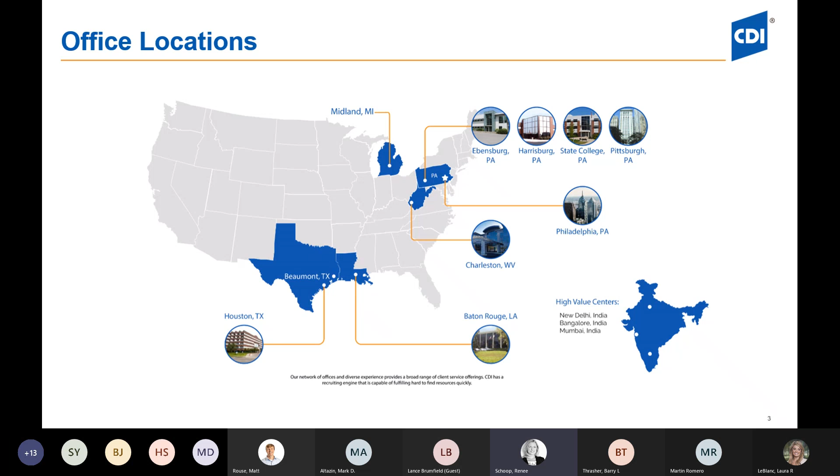Next slide please. So this is Barry Thrasher. We're very lucky to have great talent across this entire company, and today I'd like to introduce Barry to you. He's a very long tenured and very talented engineer.

He's got over 30 years of experience in technical leadership roles and mechanical engineering at manufacturing and production sites, including upstream, midstream, and downstream oil and gas, and chemical, petrochemical facilities, including catalysts. He's been a subject matter expert at numerous sites and locations, not just domestically but also internationally. Barry's led efforts on analysis and mitigation of complex mechanically induced vibration, flow induced vibrations, and acoustically induced vibrations throughout his entire career, and that's actually what he's here to talk about today. So without further ado, Barry, I'll hand it over to you, sir.

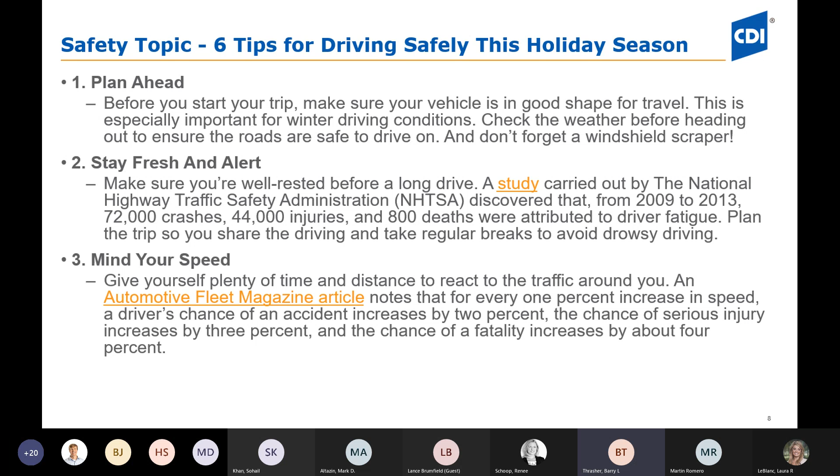So mind your speed. Give everybody plenty of time to stop and react, because everyone's in a hurry this holiday season. Getting there 5 minutes later is not going to change the holiday, but having an accident and not getting there does change everything horribly bad. So mind your speed.

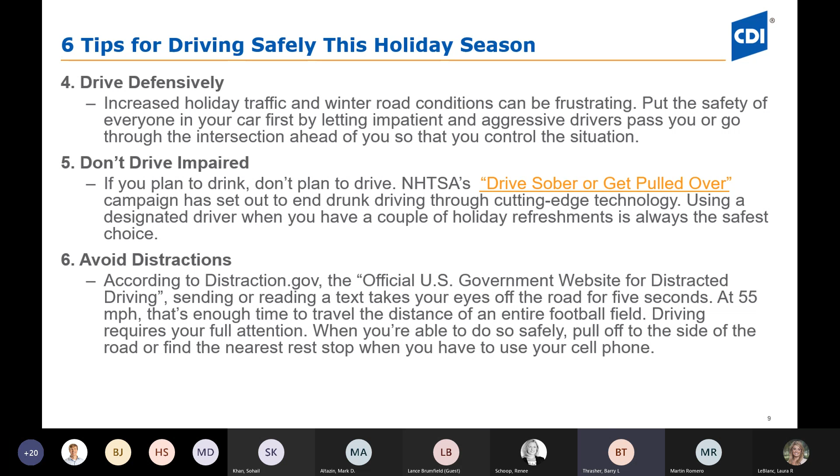So without any ado, we get into the evaluations and mitigations of vibration-induced stresses.

So basic agenda for this discussion is some basic information focus. We're going to go over a few key definitions that'll help. But the real purpose here is we want everyone to walk away and understand why some piping systems vibrate when they're in service. We also want everyone to walk away understanding some common causes of that, and how to readily recognize them, whether you recognize them while they're actually occurring in the field, or you recognize them when you're proposing a new project or going to develop a new project in a particular phase.

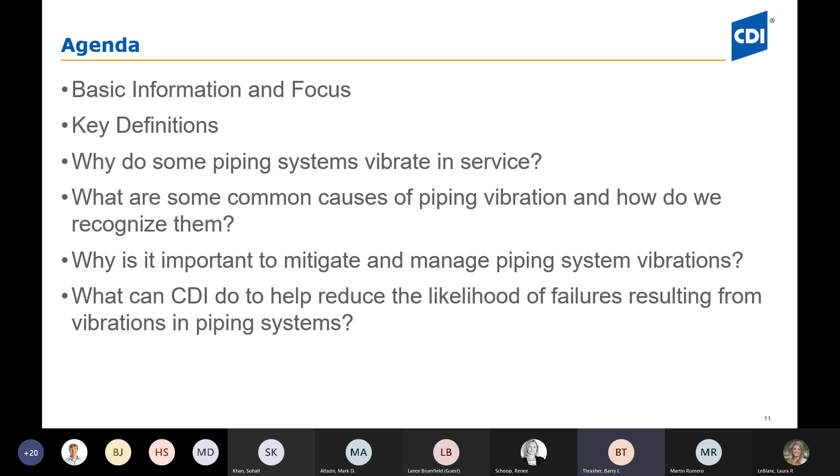And we want to explain some of the reasons why it's important to mitigate and manage those piping system vibrations. And we would also like to highlight how, what could CDI do to help reduce likelihood of failures resulting from these vibrations in piping systems. So the objective here is everyone walk out of here being able to answer these questions.

So first thing I want to talk about briefly is static and dynamic pipe loads, because obviously dynamic pipe loads are what is our driver for dynamic stresses. But I did want to give a background here to some static loads, so we can easily distinguish between what is and isn't. So a static load is the influence of the pipe system uniformly, such as weight, pressure, and they normally would influence it gradually, such as thermal expansion. These loads, we normally would not care about a time component with, because it would be ignored, and also it has little to no effect on the system.

Some examples of static loads would be weight, pressure, thermal expansion. Uniform loads such as ice is a good uniform load. It's occasional, but it is a good uniform load. Wind loads, we would treat wind loads as a static load, and analyze a piping system.

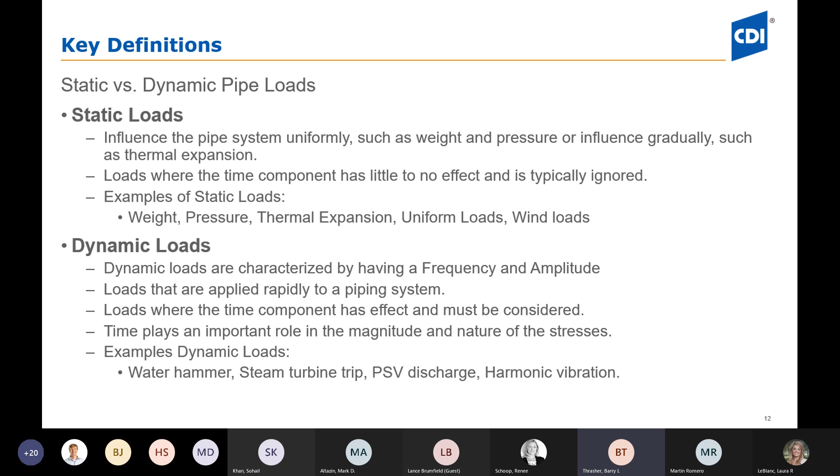Now, dynamic loads are characterized by having a frequency and an amplitude. These loads are applied rapidly to a piping system, and these loads are where we need to consider the time component of how that load is being applied. Time's going to play an important role in the nature and the magnitude of the resulting stresses from that load. We'll talk later about a pressure surge, and you'll see where time really plays a part in that. Some examples of these are water hammer, pressure surge - same thing, steam turbine trip, a PSV discharge, and then of course we're going to talk about some harmonic vibrations as well.

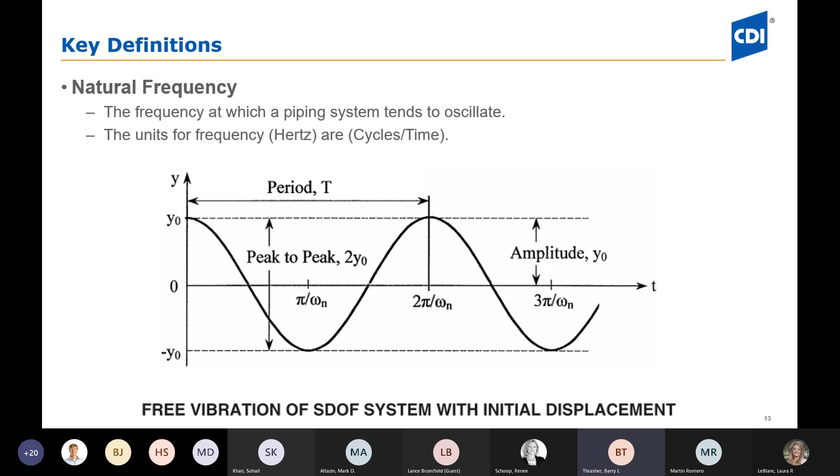So with that being said, we're going to look at a couple other things. Many of us understand what natural frequency is, but we need to understand that every piping system has a natural frequency. We also want to understand this frequency is normally measured in hertz, and it's normally some cycles per time. In hertz, of course, it'd be cycles per second.

So we want to talk about, this is one of our first questions: why do piping systems vibrate in service? In service, there's steady state loads on the piping system, which are considered to be balanced. And then in service, dynamic loads that would tend to be unbalanced. And the unbalanced forces tend to actually create this vibration.

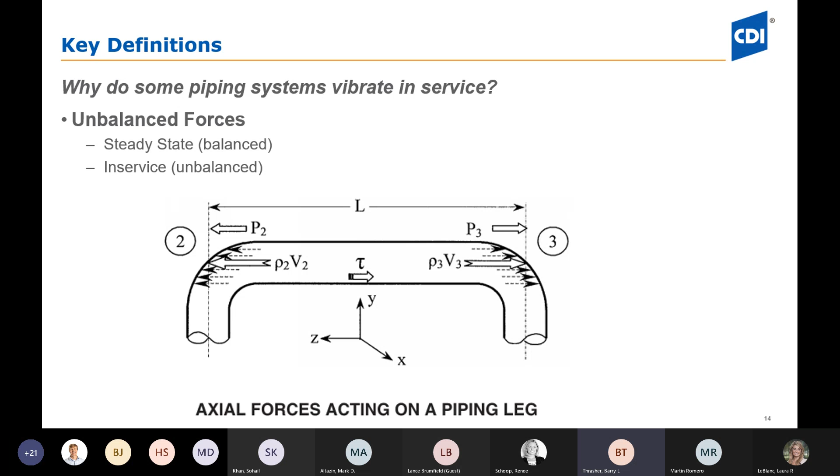And so in this diagram you're looking here, if P3 and rho V3, that force generated by that is greater than P2 rho V2, then of course you would have some force driving this thing to move. So I really wanted everyone to understand why they vibrate - they truly vibrate due to unbalanced forces within the piping.

So what are some common causes for piping vibration, and how do we recognize them? We're going to take a minute in the next few slides, and we're going to kind of talk through these briefly: mechanical excitation, flow-induced turbulence, some pulsation, high-frequency acoustic excitation, cavitation, flashing, and we're going to talk also about some surge and momentum changes as well.

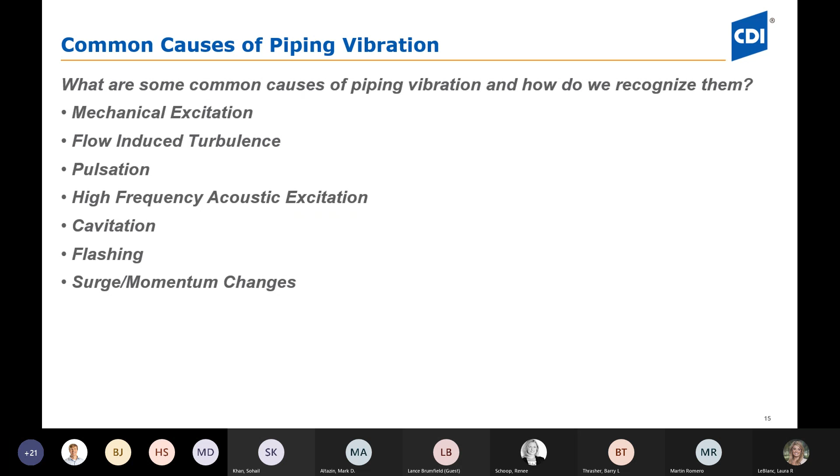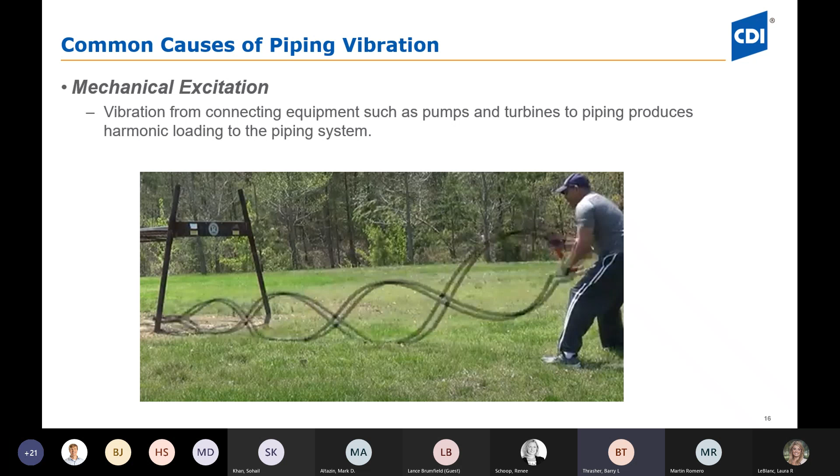Another good thing this picture demonstrates is how this excitation and harmonic dissipates toward the anchor point. If you notice at the anchor point, it's anchored there and pretty much doesn't exist. So I wanted to go through this - I thought it was a good way to illustrate that.

Another one we're going to talk about is flow-induced turbulence - generating in a straight run piping by a turbulent layer at the walls, with the severity dependent on the flow regime as defined by Reynolds number. Most of us are engineers and understand what a Reynolds number is. I'm not going to get too deep into the correlation between flow induced vibration and flow induced turbulence with a correlation to an actual Reynolds number.

That would be a whole other deeper subject. But in most cases, the dominant sources of this turbulence really manifest themselves around such things as bends, tees, reducers, and partially closed valves. We're going to talk more about that in the next few minutes.

Pulsation is reciprocating equipment - anything positive displacement, pumps, compressors, and even some centrifugal machines also deal with pulsation as well. And then, of course, dead leg piping is something I've seen often where we'll have a main line and another line you use very infrequently. That, for all practical purposes, is a dead leg piece of piping because it's not in service all the time, but yet it's causing some vibration issues on the main line.

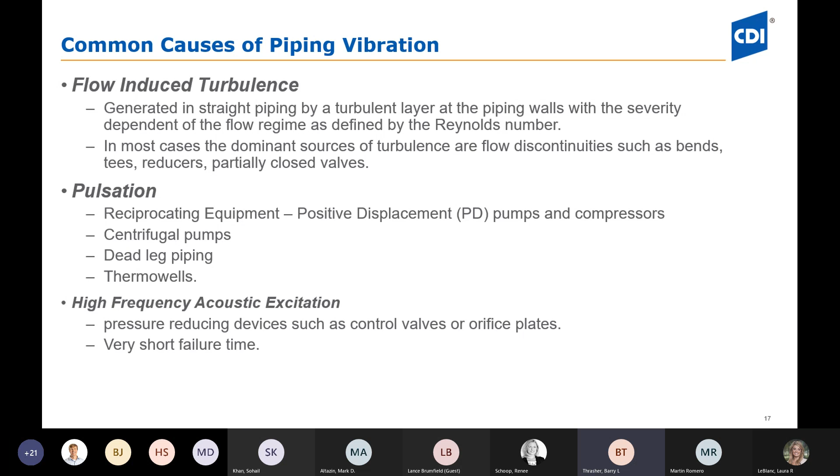So I want to talk about cavitation in a minute. Cavitation is a dynamic process of bubbles forming in a liquid. These bubbles form when they go through a contraction, and then after the contraction, the pressure is trying to reestablish itself downstream of this, such as a flow orifice or a valve, whatever the case may be. Cavitation is actually those bubbles that are formed collapsing as they're colliding with the walls of the piping. I have a little diagram down here at the bottom that's a pretty good illustration, because we're going to look at flashing in a moment as well.

We're setting up a normal, or successful, control valve - we would look something like this, and we would never want to dip down below the vapor pressure. But in cavitation, if you notice here, the pressure drop dips down below vapor pressure and then recovers back above vapor pressure, so the bubbles all collapse out.

If you notice flashing here, flashing is actually where you dip the pressure below vapor pressure and then the bubbles really don't necessarily recover back out and collapse. And you end up with a two-phase flow regime downstream.

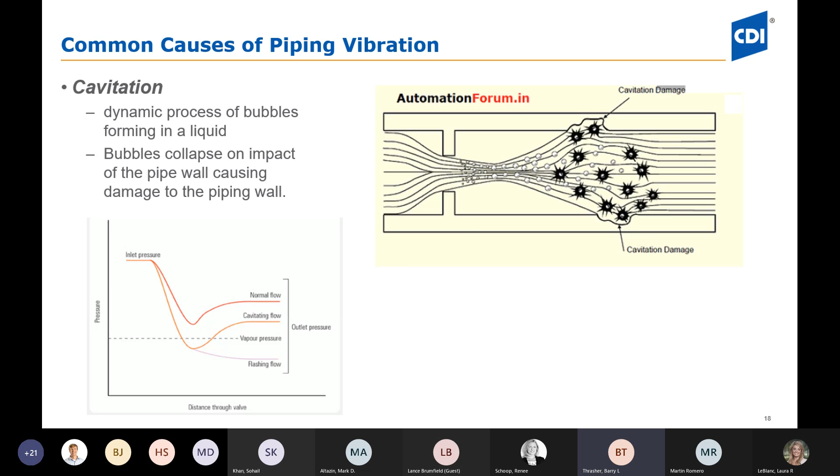So we'll look at this here, this is a little more blown up illustration of that - the pressure drop going across the orifice, and then of course the recovery does not really get back to above vapor pressure, and you end up with a mixture of two-phase flow. Now, way down the pipe, it could possibly recover back above the vapor pressure. But when this occurs, vibration excitation basically sends shock waves down the pipe that propagate from that origin.

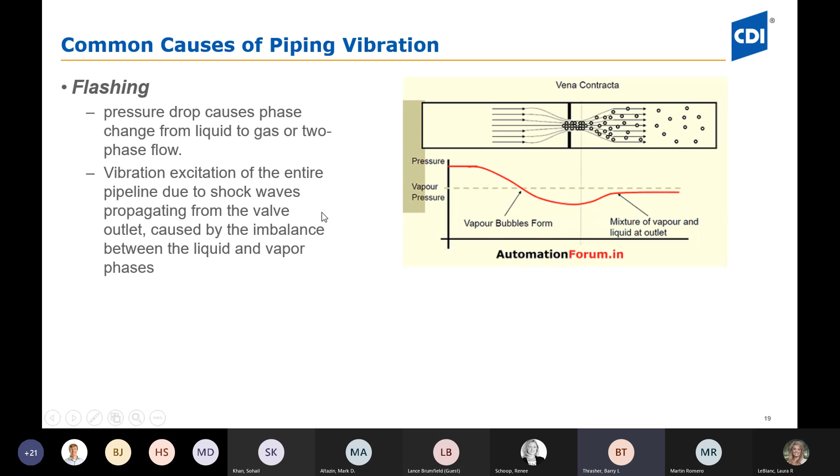And it actually results in an imbalance that's caused by liquid vapor phases and two-phase flow. Everyone's probably fairly familiar with it. It can be kind of tricky.

I want to talk a minute about surge and momentum changes. Most of us have dealt with these in more than one place, but surge, simply put, is when I have a long piece of pipe, and I'm flowing a mass down this pipe, and at the end of that, we're going to close a valve. Of course, from that closure, all the momentum of that flow wants to keep going. That, in a very layman definition, is what we would refer to as pressure surge.

I have an example, a really brief couple slide example. I'm going to show you in a minute how to deal with that.

And relief valve discharge - most all of our plants and clients are familiar with that. As this relief valve would release, and we just, for this illustration, show it turning up here, there's quite a bit of force pushed back down from that exit velocity of that flow, that discharge.

So steam turbine trip, we touched on that a moment ago. This tends to create a water hammer effect in a steam inlet line. It's somewhat synonymous to this, but a little different product, a little different flow problem.

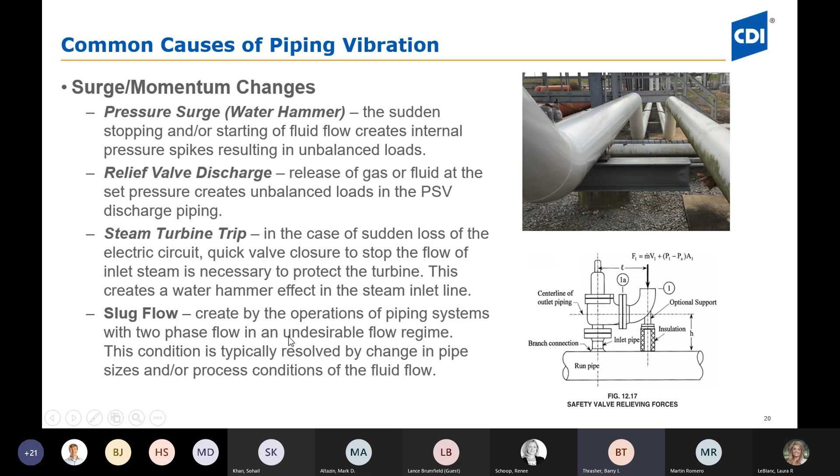Then we have slug flow, and slug flow is really created by operation of a piping system with two-phase flow in an undesirable flow regime. In two-phase flow, there are a lot of different flow regimes you could try to operate in - dispersed, and there's a flow regime where slug flow will actually form and occur. Typically we would resolve this by changing pipe sizes - maybe we want to reduce the pipe size, speed the flow up to get us out of that slug flow regime. Or maybe we'd like to change the process conditions and put more gas in there, less gas in there. But often that's solved through one of those means.

So why is it important to mitigate and manage piping system vibrations? Well, fatigue cracking is probably going to lead the race there. Based on what research I've done, fatigue cracking has been in the past a major contributor to up to 20+% in major industrial accidents.

I actually pulled this out of a reference from the Energy Institute guideline that we're going to talk more about in a moment. So about one-fifth of our major industrial plant accidents deal with some form of fatigue cracking in piping systems. That's a lot. That's why we want to do something about it - that's why it's important that we manage this.

Fatigue life can be really tricky in the sense that a fatigue life for a component can be very short, and it can be very long. It's really highly dependent on the combination of the amplitude and the frequency of the vibration.

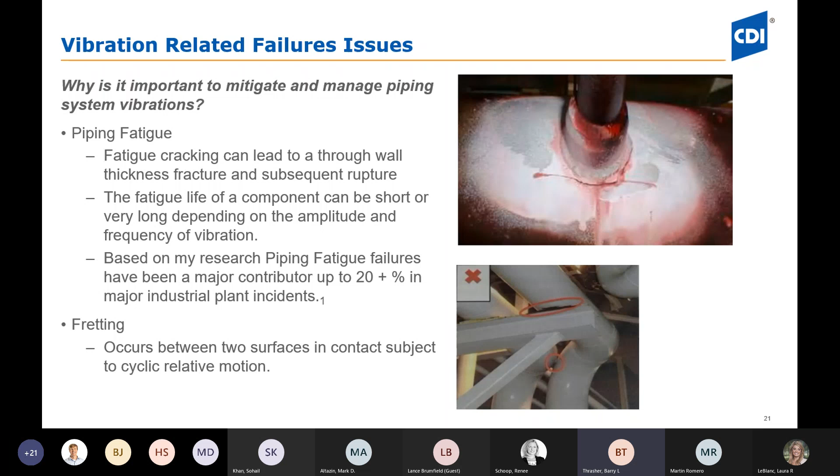So what can we do to reduce the likelihood of failure resulting from piping system vibrations? We want to go over some rules of thumb. I'm going to go over briefly some Energy Institute guidelines.

The Energy Institute published this guideline as a joint effort, with the final version coming out around 2008. It was actually a joint effort between many, many different companies, and it's a great tool for mitigating fatigue failure in piping. We're going to talk a little bit about how we can use Caesar, and how Caesar can also be used in conjunction with an EIG guideline.

We're also going to talk about how we can use Caesar to take an existing piping system and do a cumulative fatigue analysis on that system, giving you some idea of predicted replacement life. According to this analysis, your piping is probably due to be changed 5 years from now. This can really help plants and owners figure out exactly when they may want to start replacing piping due to end-of-life fatigue.

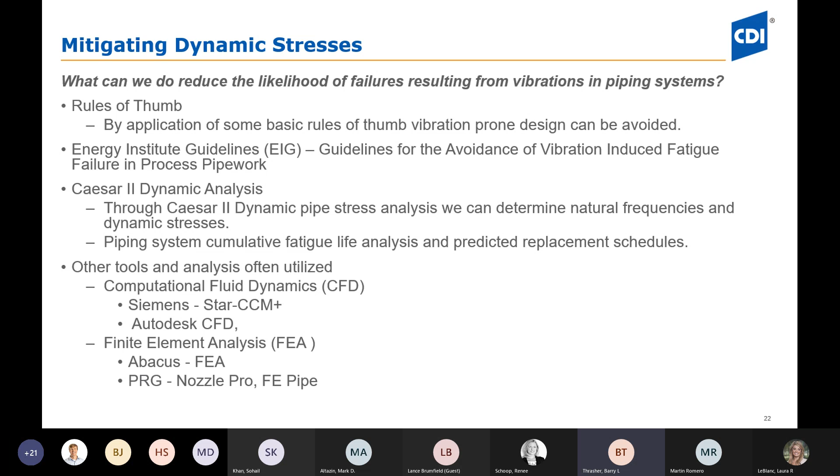So some common rules of thumb. Honestly, these are probably some of the best things that we can get out of this and walk away with - us, our piping designers, the project managers - understanding these few things right here really helps a lot.

So we want to minimize bends, tees, and dead legs. We really don't want to put any more of these in than we have to. One, bends, tees, and dead legs cost money - it costs money to weld it in, and it also causes other problems with the piping down through its course of life.

We definitely want to avoid concentrated weight at pipe midspans. If you look at a good sized midspan and you need to put a shutoff valve in between these two supports, you don't want to go out into the middle of that pipe midspan and put that valve there. You want to locate that valve toward one of the supports.

We can provide clamps, guides, and anchors to reduce flexibility and limit movement and instability. This is actually pretty important too - we want to keep the stiffness of these structural supports about twice the stiffness of the pipe span or greater.

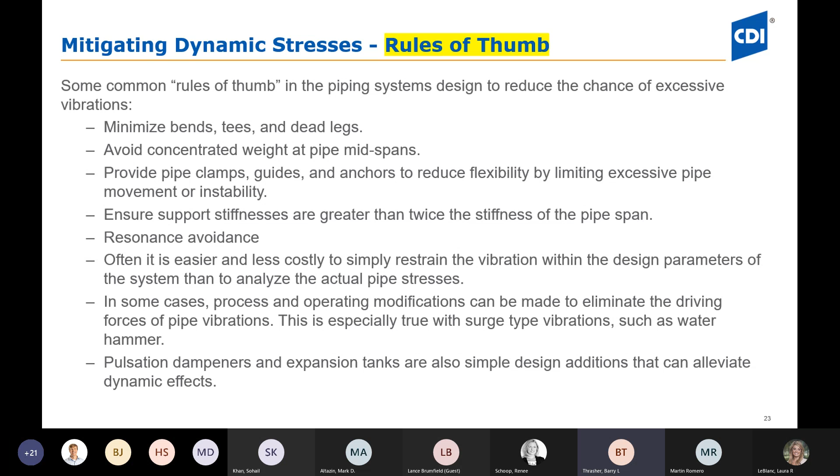In some cases, we may need to look at actually modifying our process conditions to avoid dynamic related issues. At times we also add pulsation dampeners, expansion tanks, and vibration snubbers on piping systems. So there are other mitigations we can add through additional design as well.

So I want to talk a little bit about Energy Institute guidelines - this is the avoidance of vibration-induced fatigue failure in process pipe work. This EIG guideline is a formal methodology developed to minimize the risk of vibration-induced fatigue. It's actually a really great guideline - I would encourage everyone to get a PDF copy of it and take a look.

I know at first view it looks daunting, because there's so many steps - go here, do this, go here, do that. Personally, the first time I ever looked at it, I was like, wow, this is a lot. But after a while you get a feel for what it's doing, and it tends to become second nature to you.

So these guidelines can be used in a lot of ways - applied to a new design, an existing design, a change you may want to make to an existing design, and they're also really useful in solving any type of identified issue in an operating system today.

You've got a plant and this piping seems to be moving with some frequency and amplitude from your visual observation, and you think, well, I wonder how long that pipe's going to shake before it's going to break. This guideline can be really useful in evaluating that as well.

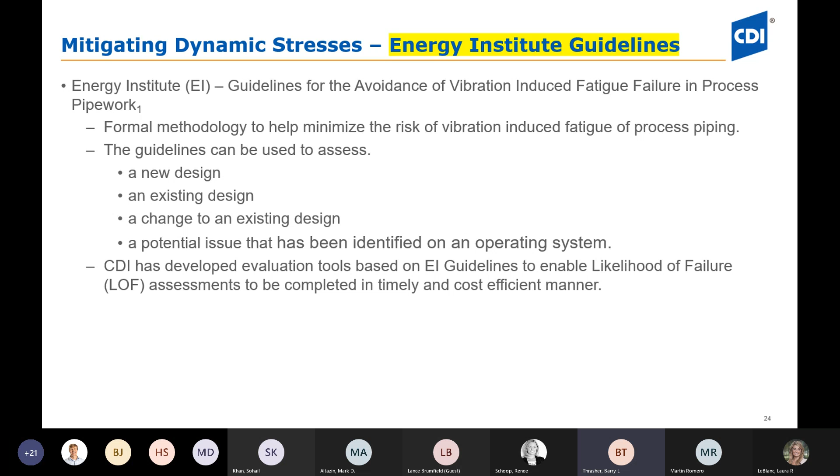So for the sake of an example, we're going to do a simple walkthrough - and this is really how simple these guidelines can be.

Obviously, when it's a different fluid, it's a little different roadmap. But for this example, I picked a gas, and it's single phase.

It's all gas. So step one, we're going to calculate a mass momentum number, which is actually density times velocity squared, which is purely mass momentum, if y'all recall from school, rho v squared.

When we get this number, the guidelines have some mass momentum numbers. They say if it's below this number, the likelihood classification is low, and I probably wouldn't even look at it anymore. Or if it's in this range, it's a medium classification, and you may want to do this and this. So the guideline gives you a roadmap to follow.

Getting a mass momentum number is pretty straightforward. So let's say here we want to proceed.

Next we're going to calculate this fluid viscosity factor. Really, the only major special thing about this is that kinematic viscosity number for the gas. It's a function of the kinematic viscosity of the gas.

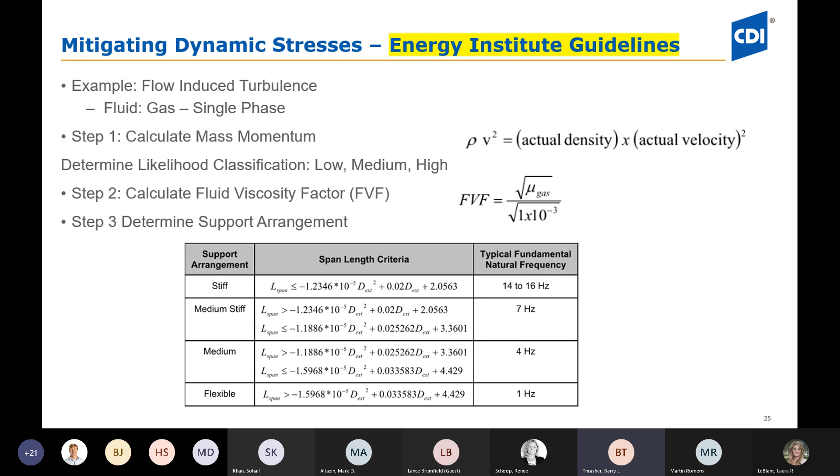I wanted to kind of throw in there how we use Caesar Dynamic Modeler. And once we do that, we calculate the flow induced vibration factor. This is all out of the EIG guideline.

It's not a horribly complicated equation. It's alpha, and then there's a D outside over T, raised to this beta factor. So the equations are fairly straightforward, not super complicated.

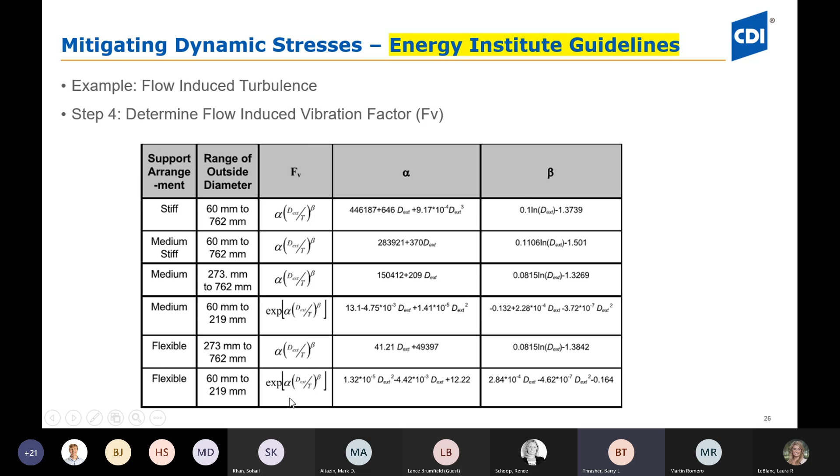So we get to this, and then we calculate this likelihood of failure number. Understand, this is not saying if I got an LOF of 0.3, that means I have a 30% probability of failure. No, that's not what this number tells you. What it tells you is, based on historical data, with this LOF number of less than 0.3, you would have a very low likelihood of ever having a fatigue failure problem with that particular line.

It also gives some guidance on maybe some visual inspection you would do as well. Once you calculate this, you see it's no more than rho v squared over FV times FVF, which I just went through a moment ago.

And if these likelihood of failure numbers increase, the guideline tells you that you may want to do a small bore connection assessment, and a visual inspection to make sure all your welds are smooth and you don't have sharp edges. But when you get down to where it's at 0.5 or greater, they start actually saying you might want to look at redesigning the piping and supports.

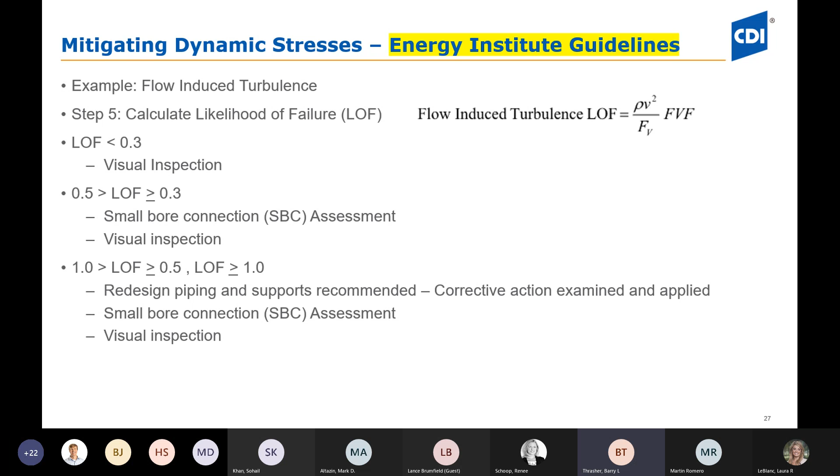So this is, in a nutshell, what the guideline does. It's pretty straightforward, and I know I've just touched on a drop of it. I'm sure some of y'all will go look at it and find there's a lot in here. I've only touched on one particular type, flow-induced turbulence.

So I want to go into Caesar 2 dynamic analysis. I'm probably running behind on time, but we use it, and mainly, as I pointed out earlier, we use this in several ways.

One, we use it to get natural frequencies of some complex piping systems. We also use it to predict the dynamic stresses we're seeing on a particular set of piping. And then we can use Caesar, set in a set of operating conditions, and do fatigue life, cumulative fatigue damage analysis on a piping system.

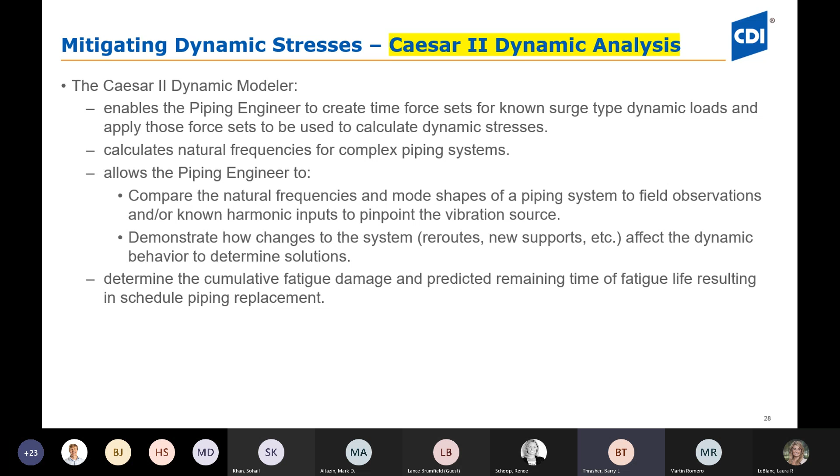It doesn't have to be a new system, it could be an existing system. If you have a system that's been vibrating for years and you're wondering if that's really a problem, it can be looked at, and you can get an idea of what your fatigue life remaining is on that, rather than just not knowing anything.

So some other tools that we often use, I wanted to give you a real brief here. We use CFD, and one of the things we've successfully done that I find really amazing is perform co-simulations using STAR CCM, actually running a CFD model inside an Abacus FEA model and getting actual forces and stresses all within one model, doing the computational fluid dynamics at the same time within the same solver.

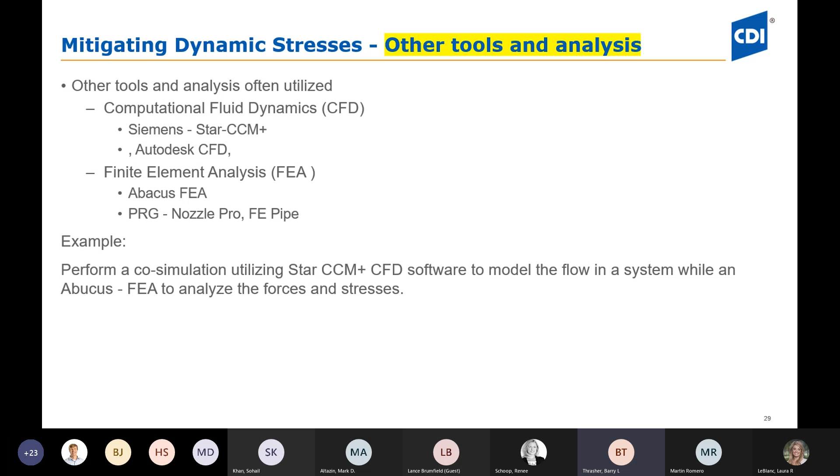This is a fairly complex analysis, but we've had clients with a flare line having two-phase flow. They don't have great data on it, but they kind of know what's going in there, so we can put that into the model and run it to get ideas of what's going on with respect to forces and stresses.

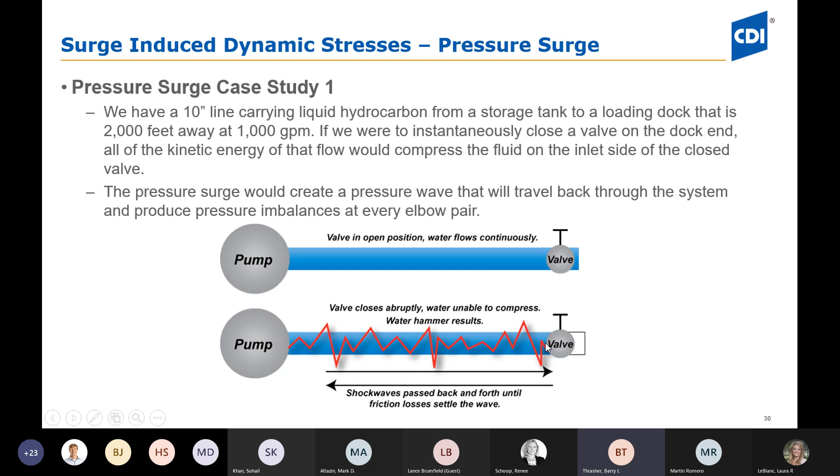So I'll do a real quick pressure case here on a surge. We have a 10-inch line carrying fluid to a loading dock, a couple thousand feet away, running 1,000 gallons a minute, with a valve at the end. Let's say we have a regulatory project where we're putting in breakaway valves, loading on the Mississippi River. We're going to install these breakaway valves so when the ship pulls away, it just pulls the hose away from the dock, and the valve shuts itself immediately behind that. So in this case, we want to talk about what kind of force we'd see down on the other end of the pipe.

So it's a real simple calc, most anyone could do. You could calculate a really rough surge pressure just from the density of the liquid, the speed of sound through the fluid, and a change in velocity. That's not a huge effort to calculate. You can say, well, I'm expecting to see a pressure surge of about 233 psi.

So then from a really simple calc, you can figure out what kind of force that would be on the piping. It boils down to 233 psi times the cross-sectional area, the internal diameter of the piping. Lo and behold, when that happens, we're going to have a force that hits this pipe at 18,000 pounds. Most times that doesn't get managed by putting in more supports; it gets managed by some pulsation expansion type tanks on the other end. But this is a simple calc anyone could do in just a few seconds, it's not difficult.